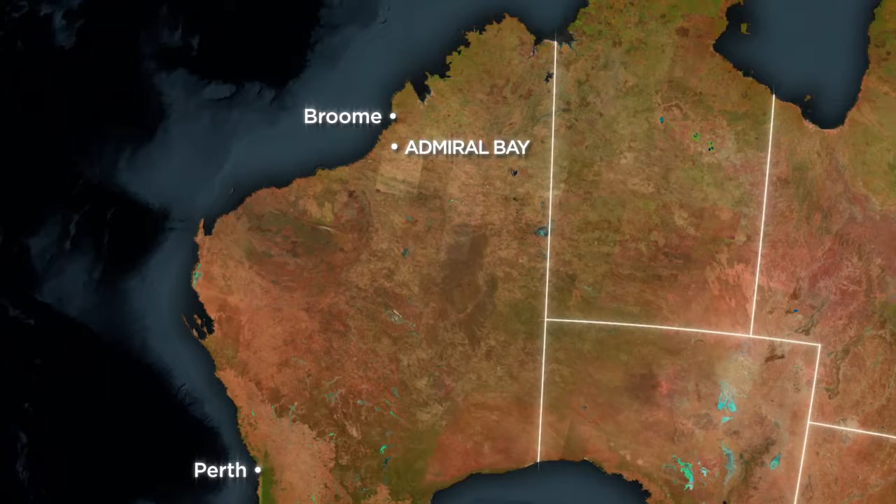Metalicity is an exploration company based in Perth, Western Australia. It owns 100% of the Admiral Bay Zinc project, located in the Canning Basin, approximately 140 kilometres south of Broome. The Admiral Bay resource is covered by 2 granted mining leases and 1 granted exploration licence, with a total project area covering more than 3,400 square kilometres of the Kimberley region.

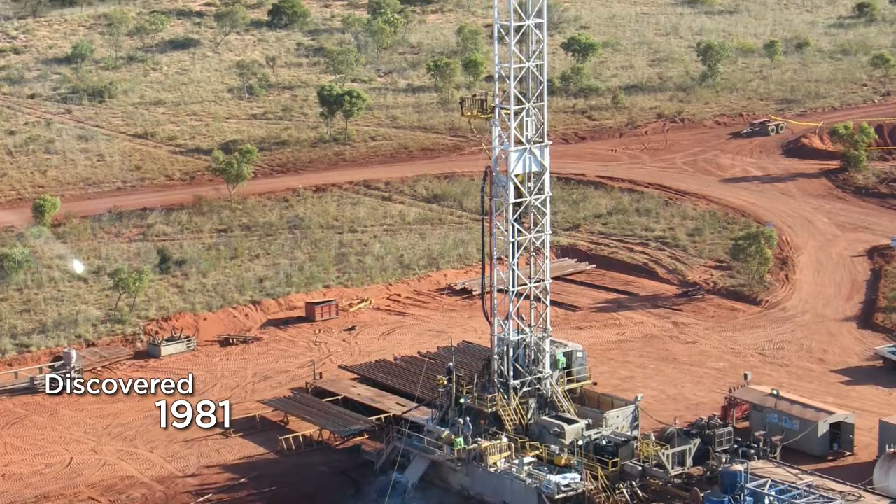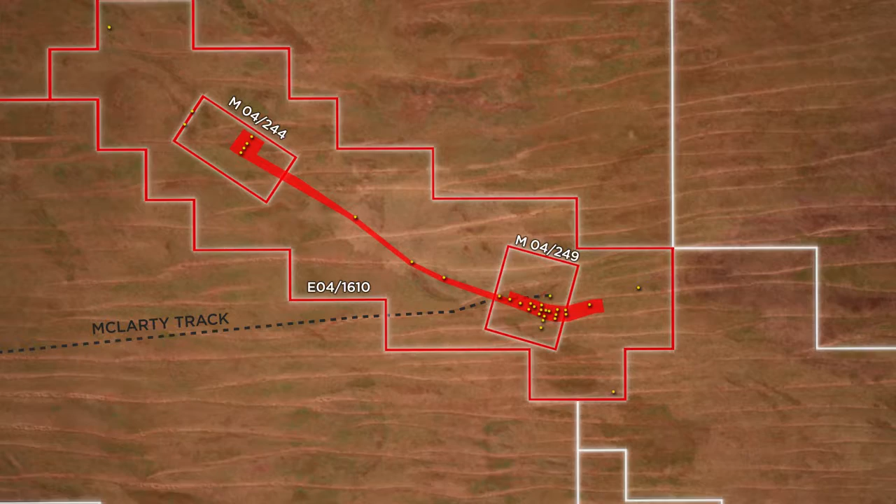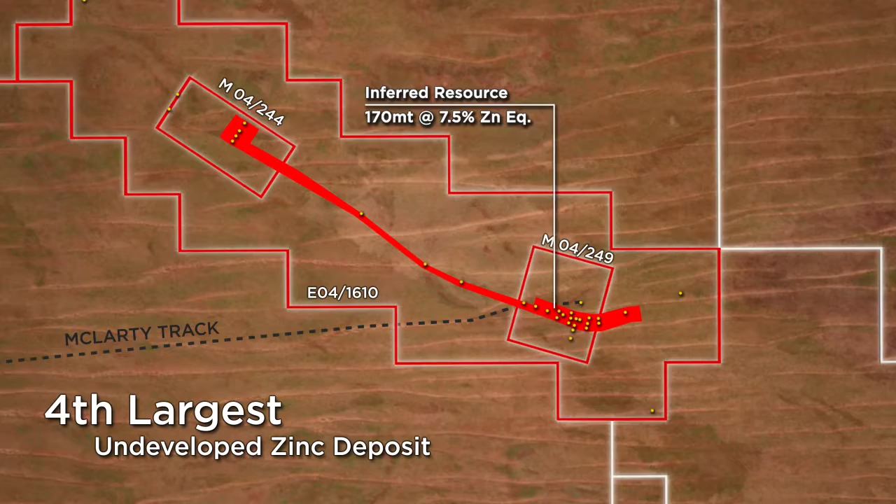The deposit was discovered in 1981 during petroleum exploration and to date has had more than $50 million invested into it. Currently, it has an inferred mineral resource of 170 million tonnes at 7.5% zinc equivalent, making it the 4th largest undeveloped zinc deposit in the world. Potential also exists for an exploration resource target of up to 210 million tonnes at 7.2% zinc equivalent.

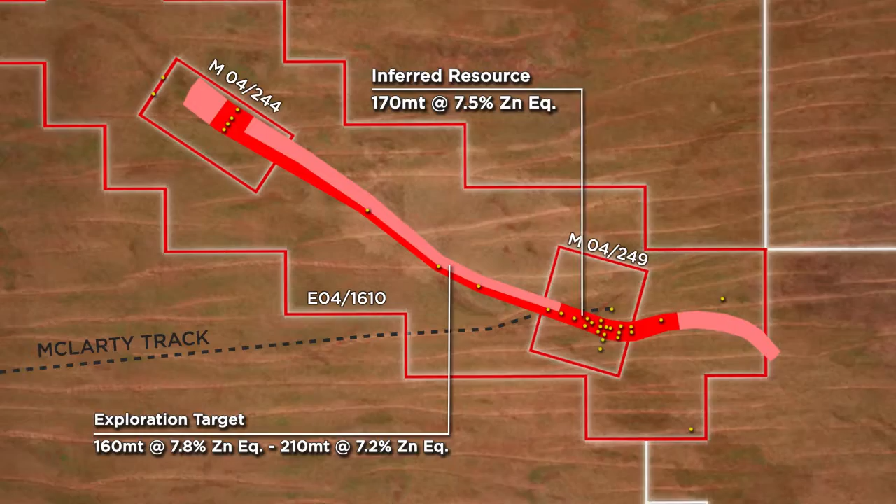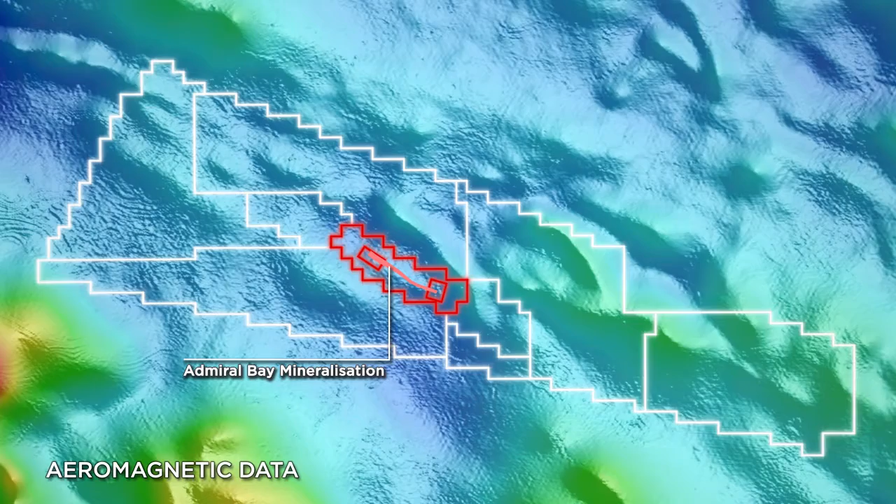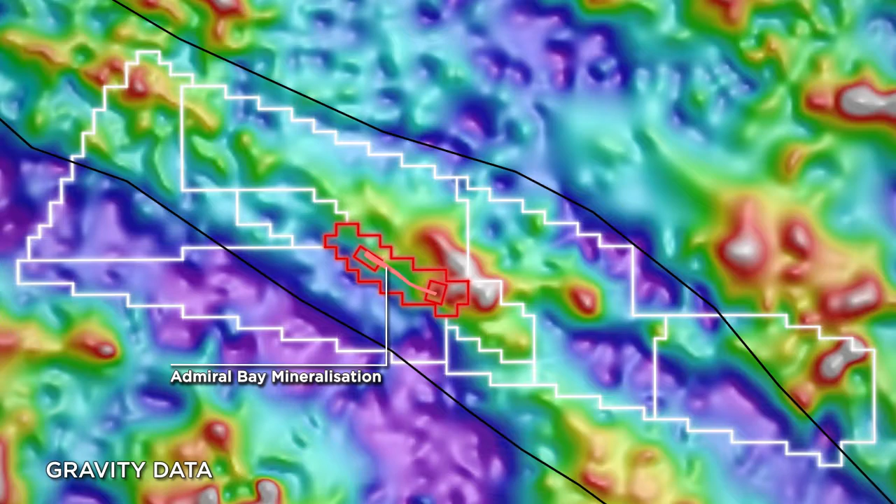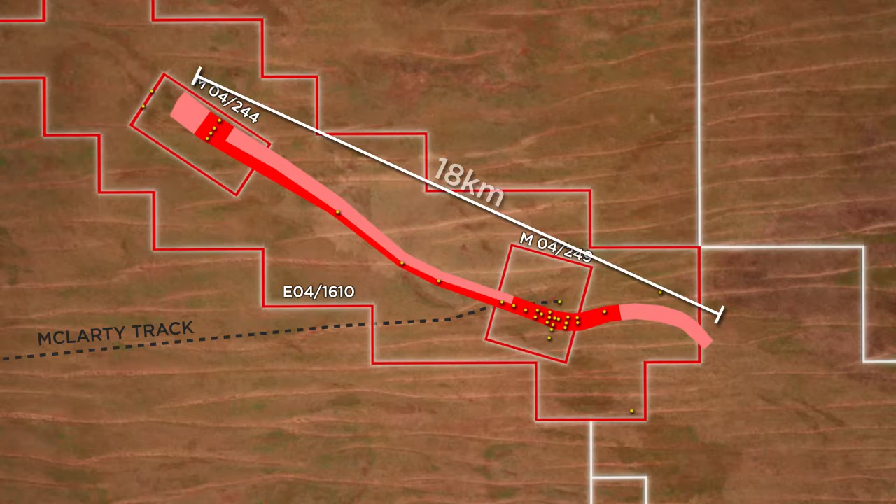The potential for district-scale mineralisation along the 130 kilometres of tenure is based on the theory that regional scale faults have acted as pathways for the mineralising fluids. The zinc and lead mineralised fluids have moved from the basement rocks via faults from the Admiral Bay Fault Zone into a uniform flat sequence of permeable rocks, which have acted as the deposit host. The continuous extent of the interpreted mineralisation over 18 kilometres is interpreted within an upright open antiform, with mineralisation pinching out away from the axis of the antiform towards the edges of the limbs.

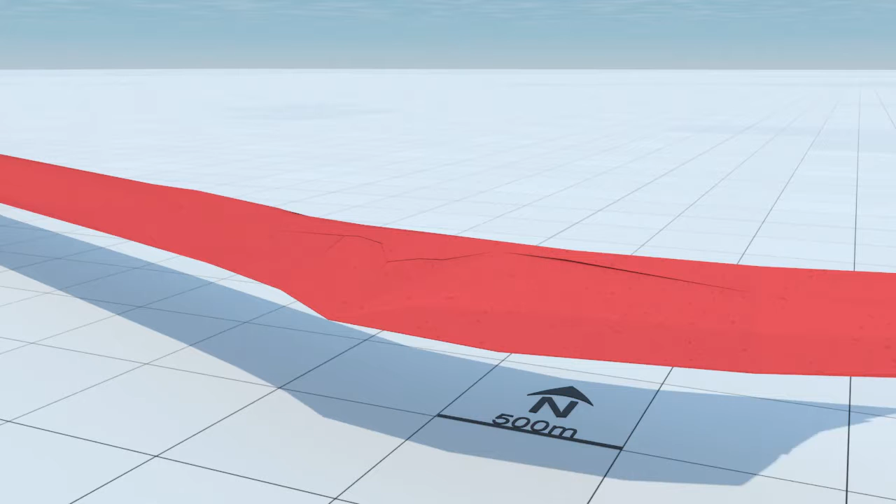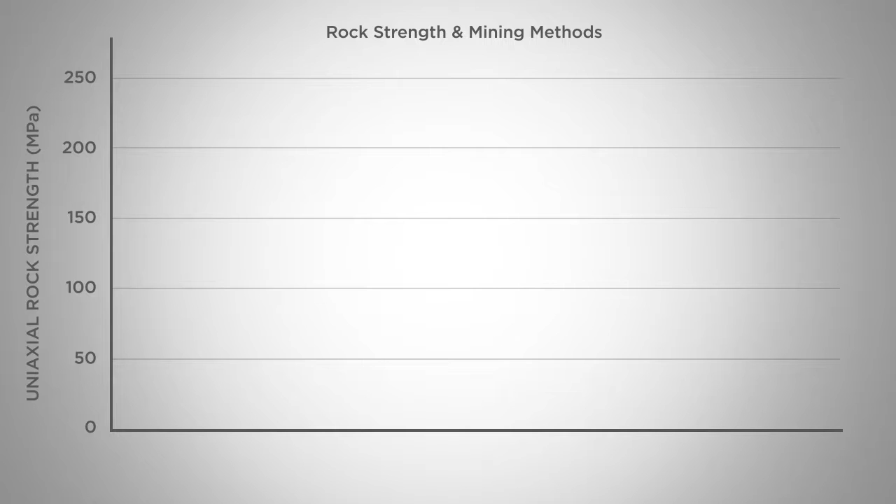All of the drill holes at Admiral Bay have been highly successful, with mineralisation intercepted in every hole, including intercepts with zinc equivalent grades of up to 16%. The mineralisation at Admiral Bay consists of sphalerite and galena, which combined is classified as a weak rock with measured uniaxial rock strengths of 26 to 44 megapascals.

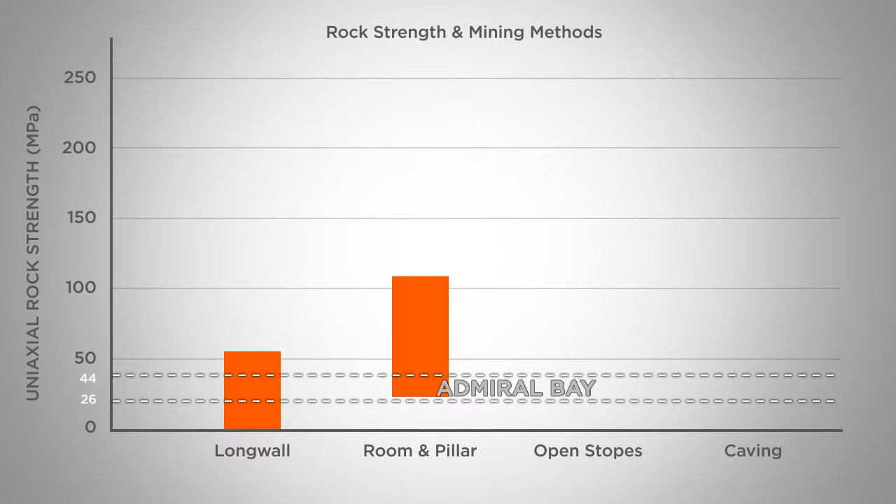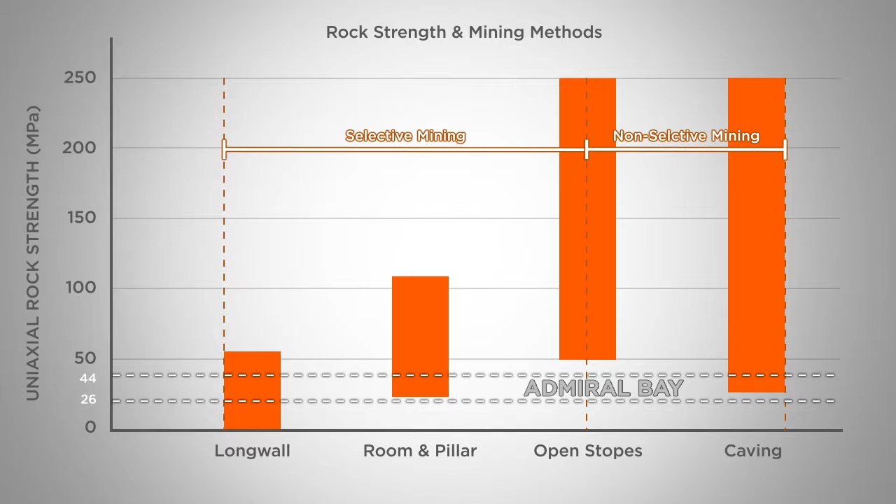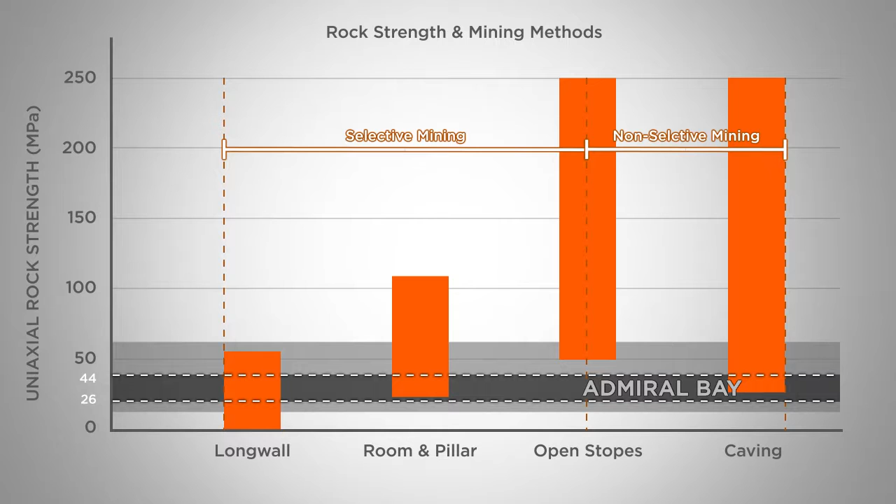Various mining methods can be considered for the project. Typically, longwall and room and pillar mining, with their variations, are usually considered the best option for selectively mining weak rock, and variations of open stope and caving mining are commonly considered for non-selective mining of more competent rock. The rock strength values at Admiral Bay make it suited to the longwall or room and pillar mining methods. However, the sub-horizontal orientation and long strike length of the mineralisation makes it ideal for longwall mining.

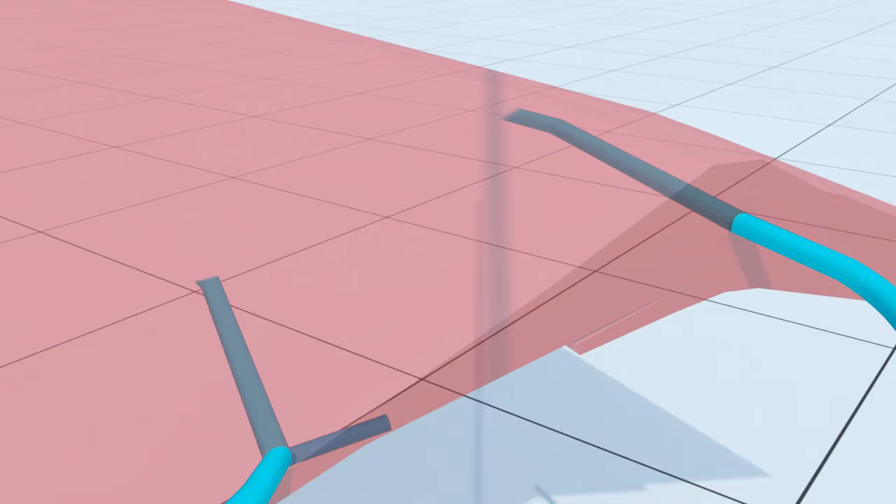To access the deposit from the surface, a conventional shaft method has been chosen. The shaft would be used for ventilation, access and material hoisting. Development of longwall mines involves the excavation of a network of haulage drifts for access to production areas and to transport ore to shaft stations. Haulage drifts are usually arranged in regular patterns and excavated within the ore.

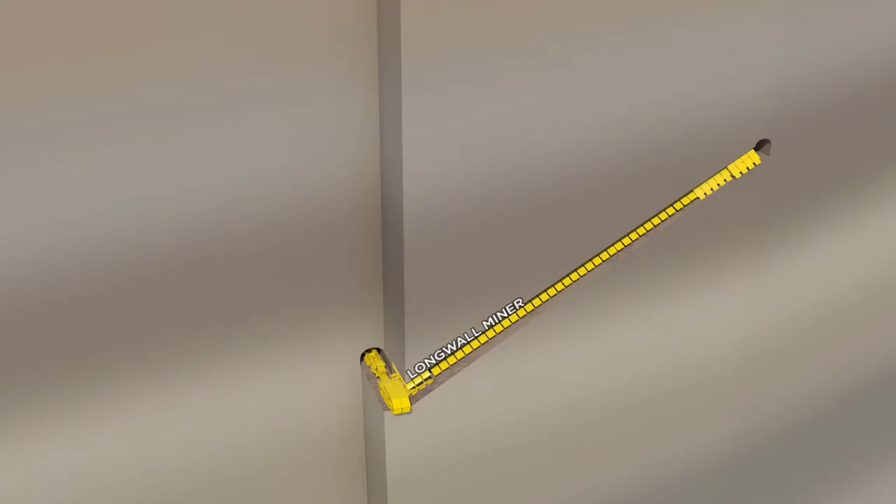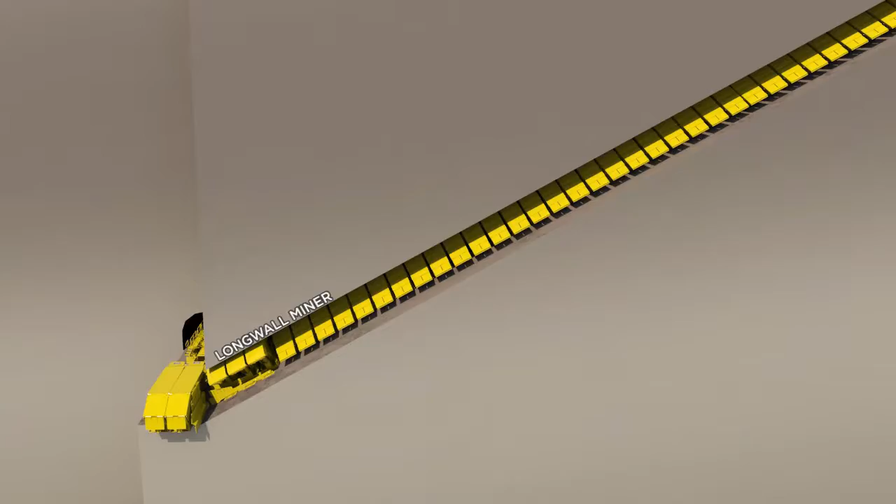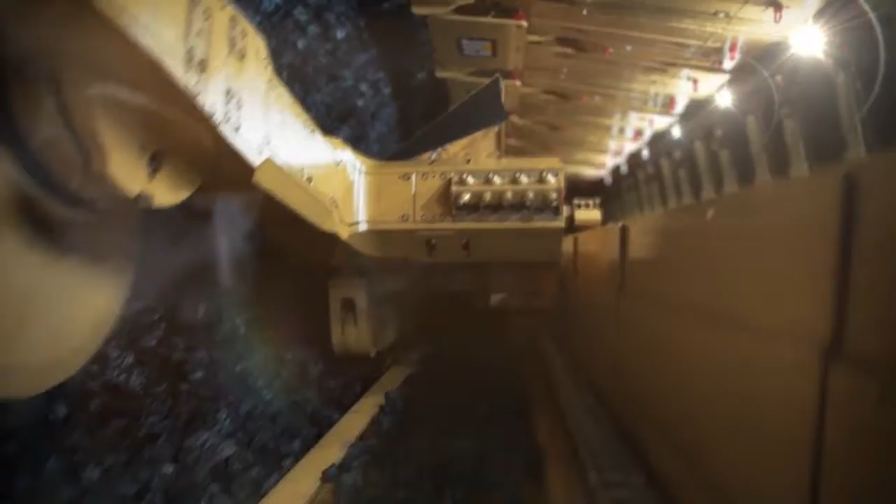Longwall mining is suitable for soft tabular deposits with uniform thickness and large continuous horizontal extents. Because coal seams and potash layers typically satisfy these criteria, they are commonly extracted by longwall mining. The longwall mining method extracts ore along a straight front with a large longitudinal extent. The soft material does not require drilling and blasting and is cut loose by rotating drums with cutters, which run back and forth along the face, each time cutting a fresh slice of the ore.

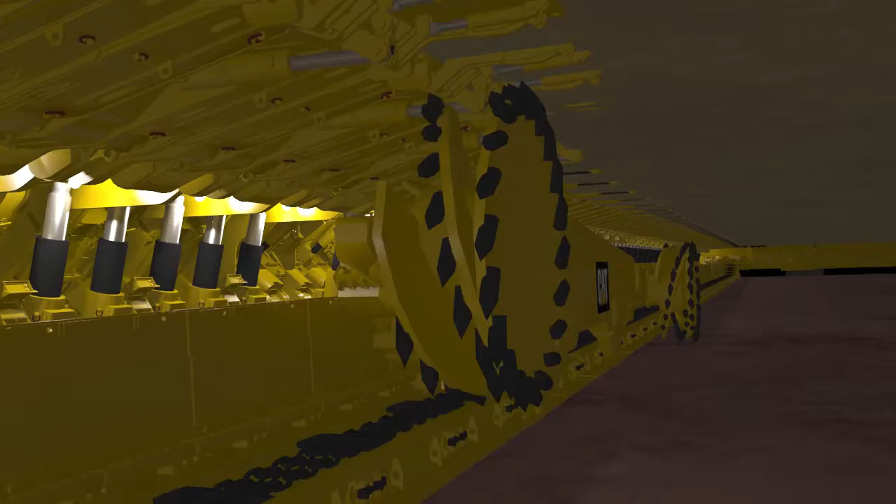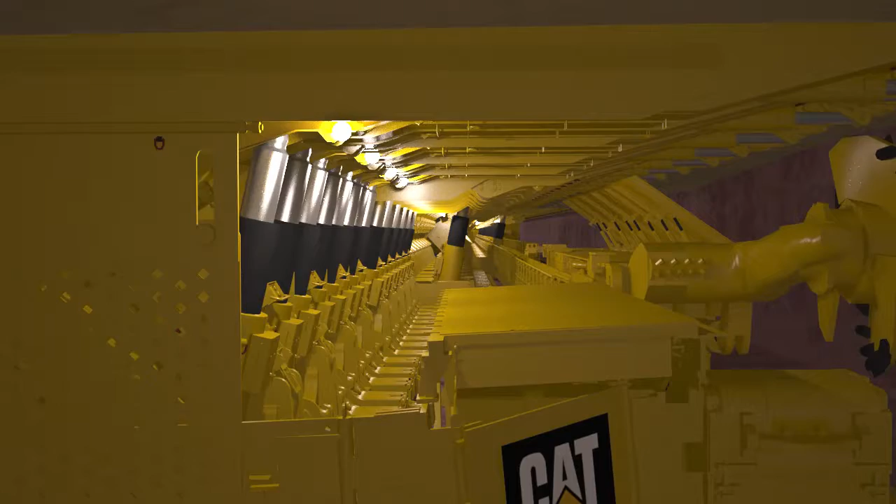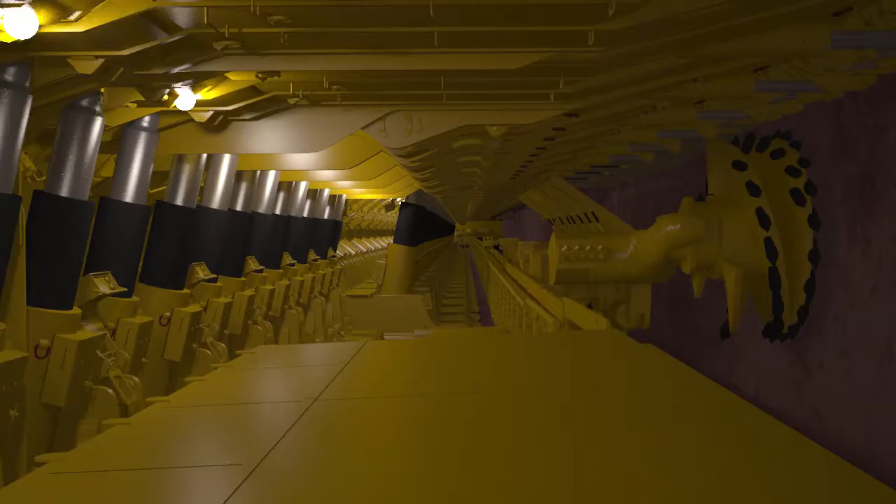The roof along the longwall face is supported and the working area is completely protected by a system of hydraulically operated roof supports. The supports move forward as mining advances, and the roof behind is allowed to collapse into the void that is left as the face retreats. Although the longwall mining equipment is remotely operated, if miners are required to maintain the machinery, they are shielded from the overhead rock by the hydraulic roof supports. The ore falls onto a chain conveyor that carries it to the haulage drift. From here, it is transported by a conveyor to the hoisting system, which hauls it to surface.

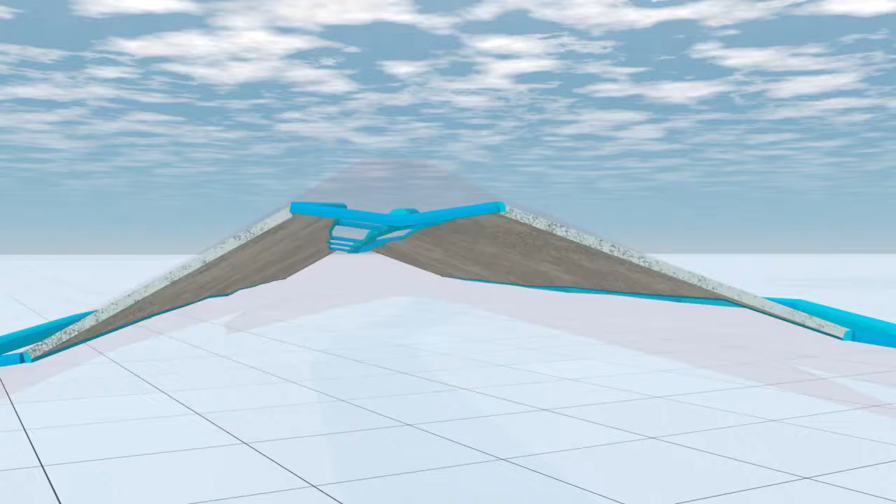The thickness of the mineralisation at Admiral Bay enables the extraction of multiple stacked ore panels. As well as stacked panels being mined at one location, potential exists for simultaneous production fronts from numerous stacked panels along the extent of the mineralised system. The mineralisation remaining can be mined through conventional hard rock mining methods at a later stage.

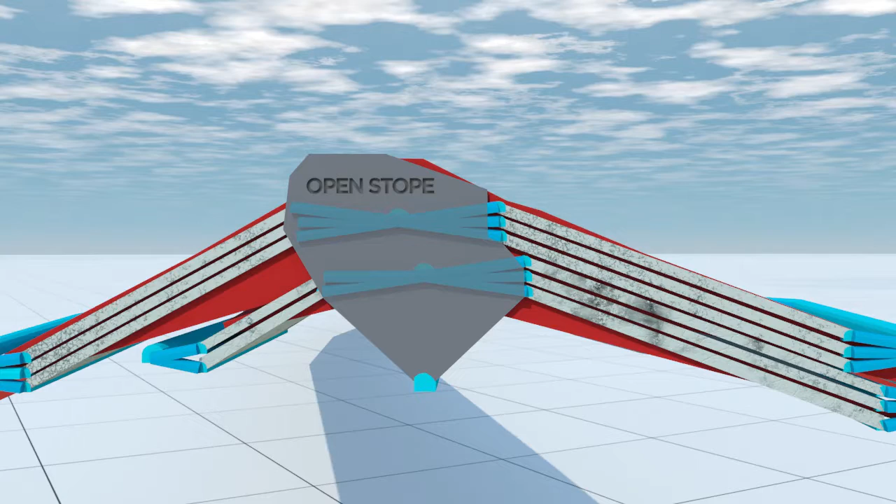The haulage of ore to the surface will be via a conventional shaft, arriving at the surface on a stockpile before progressing through the process plant for concentration. The final concentrate product is then transported within sealed containers along Great Northern Highway to Broome Port. At the port, the sealed containers are safely stacked and stored until being loaded by rotainers into bulk cargo ships for export to market.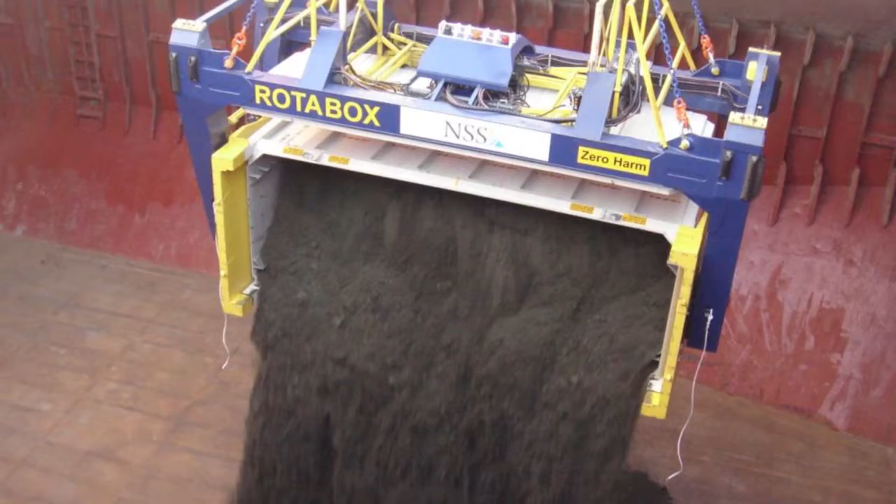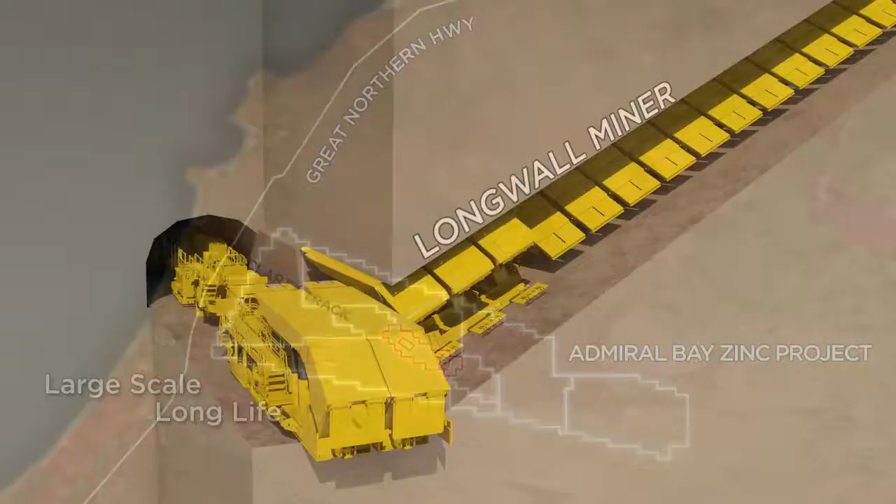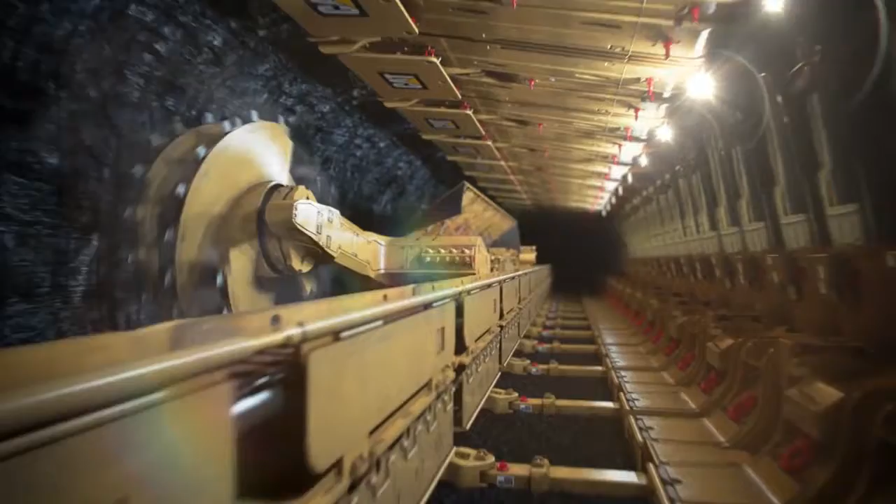The Admiral Bay Zinc Project is a large, long-life project with the potential of sustaining a low-cost, multi-decade zinc operation. The project is located in a politically stable jurisdiction, within close proximity to existing infrastructure to support a future development. By applying modern, large and fully remote continuous mining methods, Metalicity believes it can unlock the full potential of Admiral Bay's 18-kilometre resource and develop a truly world-class, low-cost zinc mine. Admiral Bay, Australia's most strategic zinc asset.